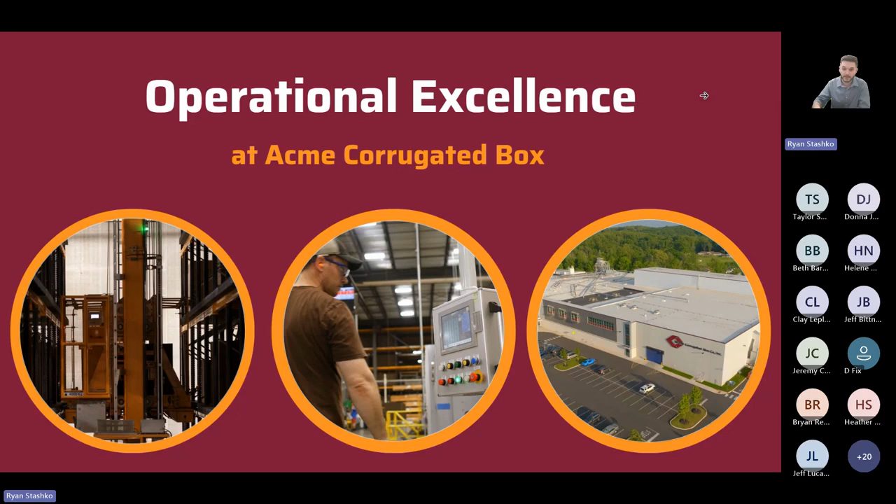As we know, technology is constantly evolving, constantly advancing, and Acme prides ourselves on harnessing that power and utilizing technology to our advantage to meet our ultimate goals. So I'll be taking you guys on a virtual tour of our WIP transfer system, and the system you're about to see is a testament to Acme's commitment to staying at the forefront of innovation and continuing to focus on how we can be excellent in everything that we do and how we can provide the best quality to our clients. So with that, we'll go ahead and get started.

So first, let's define what WIP is. It stands for work in process. In our business, it's the stacks of corrugated board that are produced on the corrugator, but not yet made into finished boxes on the converting side. The WIP transfer process is the system for how we move WIP from the corrugator to storage and then eventually to the converting side of the operation. It's a critical process for our business, probably arguably one of the most critical.

And for us, it needs to be safe, it needs to be efficient, and it needs to make sense. So today, I'll be taking you through step by step how we transfer our WIP from the corrugator to our automated high rack storage system, and then ultimately to the converting side of the plant. I'll be touching mainly on how this sets us apart from the rest and how we've deviated away from the traditional way of doing things, and why it makes us more efficient, more safe, and ultimately provides a better use for how we get to our end goal.

So with that, we'll go to the first part of the process. This whole system begins at the corrugator stacker.

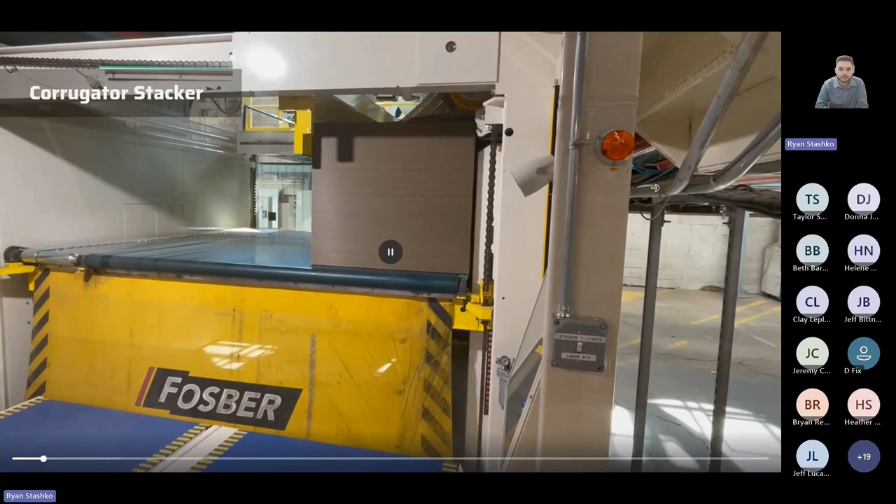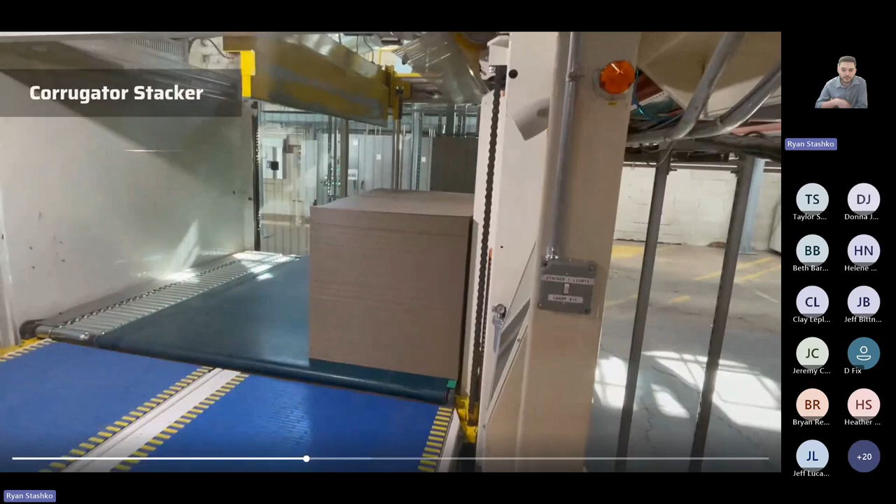What you're seeing here is what we call WIP units - corrugated sheets made into blocks or units of board. We have 3 stackers on our corrugator, each capable of running a different order, so we can run things simultaneously. Specifically, what you're looking at here is stacker 1. As the machine stacks the board into a single unit, the elevator will drop down and transfer the unit onto the outbound WIP lane.

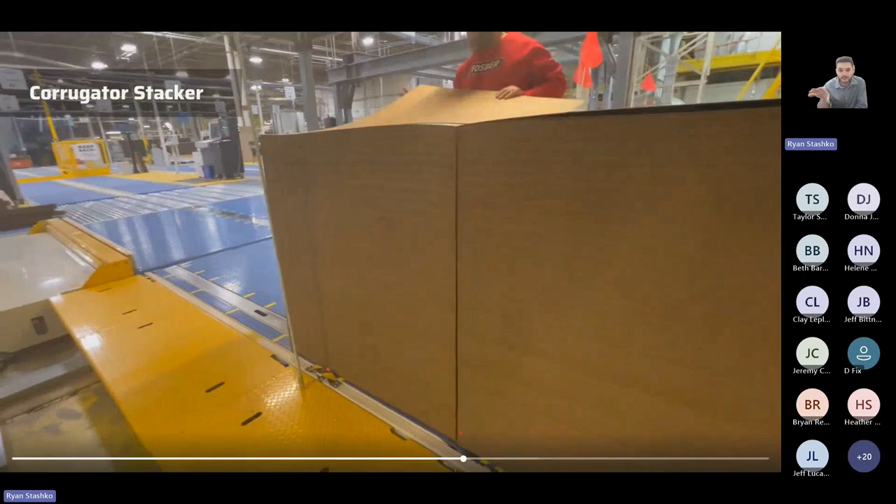For this process, there's no barcodes, no tagging whatsoever. All of the data about what's being produced off the corrugator is seamlessly transferred via software from the scheduling system to the software that controls the conveyor, to make sure everything runs smoothly and that the system knows everything about each unit being produced. The only human interaction you see at this point is the operators who check the board for quality and make sure it matches customer specification.

What you see here is this automated bar that can push each unit over to the side and make room for another stack that can then be built into what we call super blocks. This maximizes the amount of space we can use in the racking system, and it also cuts down on the congestion that happens on the conveyor lines and transfer cars, to make sure things continue running smoothly and efficiently.

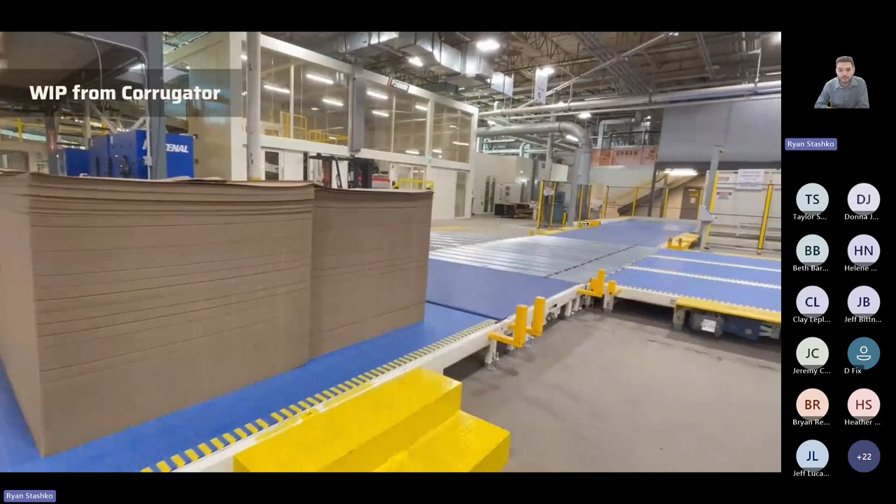From there, our WIP unit continues down the line on its journey to the high rack storage system, or we also have the ability to run our units directly out to the converting lines. We can bypass the rack if there are what we call hot orders, or orders that need to run immediately, so we don't waste time going through this process. We can go straight to the converting side.

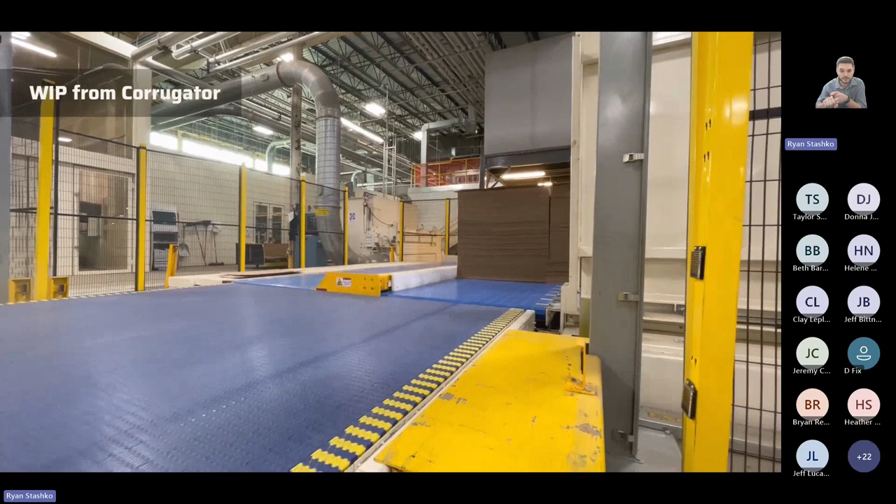But most of the time, all of our WIP gets transferred down this line as it's prepared to go into the high rack system. At this point, it's probably good to highlight the way we used to operate and the way most box plants operate today, which, as you can see here, we don't have pallets, we don't have forklifts, we don't have any banding. None of that is required in this process because of the gentle transfer between conveyors.

In the past, and how other box plants operate today, they use a system of forklifts, management supervisors, palletizers, and banding machines, to make sure all the units between the corrugator and converting are structurally sound and safe before they get to the next step of the process. None of that is required here, and it cuts down on waste, makes for a much safer environment, and ultimately increases our efficiency throughout the line.

What you're seeing here is the next step in the process before it gets to the high rack. Even though we don't require pallets, forklifts, or banding, there is still some prep work needed, which is all done autonomously. Because of the highly advanced automation, everything runs off of sensors and photo eyes, so even though a lot less material is required, there still needs to be a lot of precision involved.

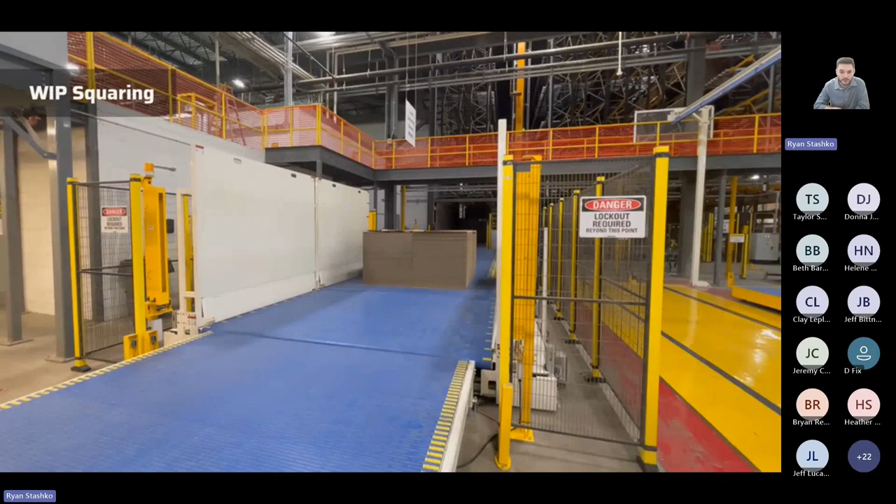So what you can see here are these inline squaring stations that each come in and square up each unit before it enters the rack, to ensure everything is nice and tight so it keeps product flowing and doesn't interrupt the racking system or cause issues. Despite not having the intricate system we had before with a lot of manual and human intervention, there's still some prep work needed, but all of it is handled through the software system, and it keeps everything moving down the line without interruption so things flow flawlessly and seamlessly.

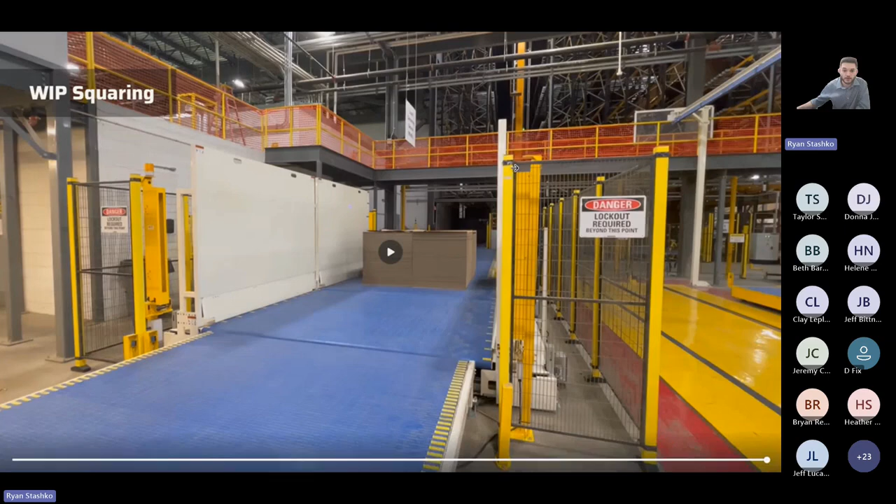From here, our WIP unit enters the next step right before we get into the high rack. What you're seeing here is our first of many automated transfer cars - this is our high rack transfer car. It's basically a conveyor on wheels that moves the WIP into the rack and also handles outbound WIP coming from the rack 24/7, 365, with no human operator necessary.

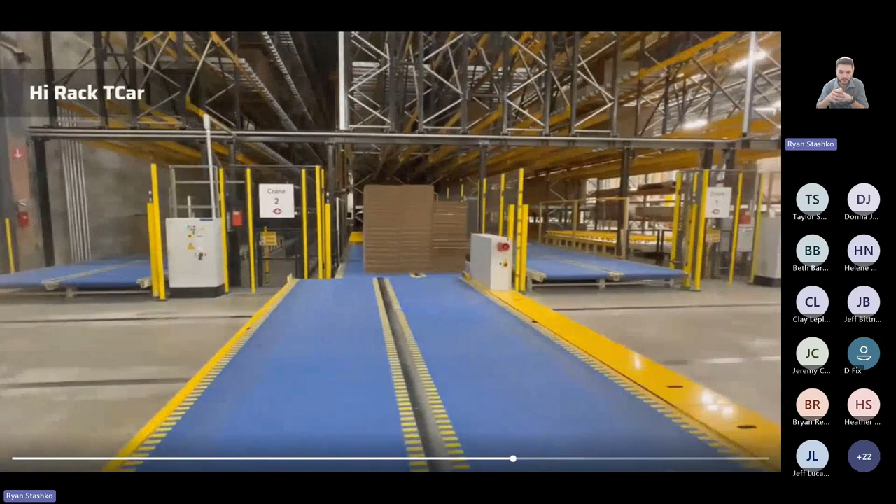As you can see here, this unit is being sent into one of 2 different aisles that we can send WIP into our racking system. Once it drops that unit off, it'll go to the next part, which is picking up the next unit that's ready to come out of the rack. As this unit gets picked up, it'll be received by the transfer car and sent down the outbound side where it's eventually sent to converting.

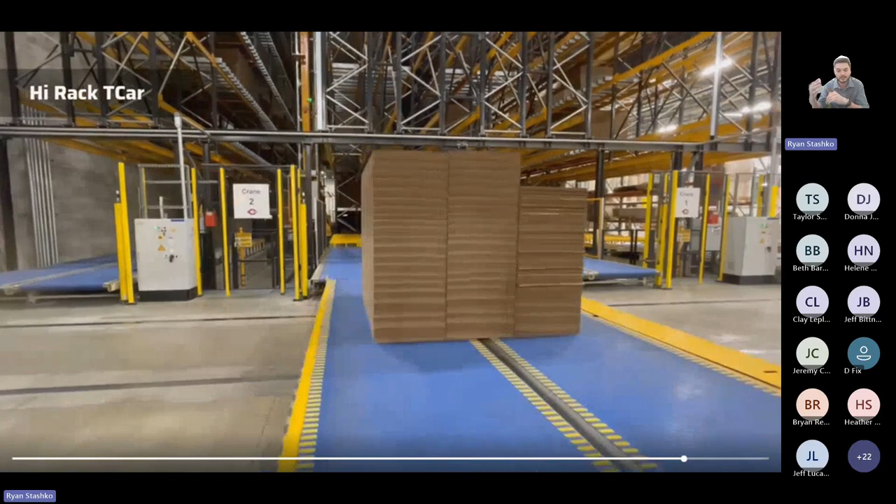Again, all of this is controlled over the cloud with different software integrations that are all talking to each other at all times, so that converting knows when a job is needed on their machine - it'll automatically talk to the rack to get products sent out this transfer car and down the WIP lanes. Similarly, the racking system knows exactly what's coming in at all times, and knows precisely how to set it and where to put it within the rack to ensure there's space and it's placed in an area where it can be recalled easily.

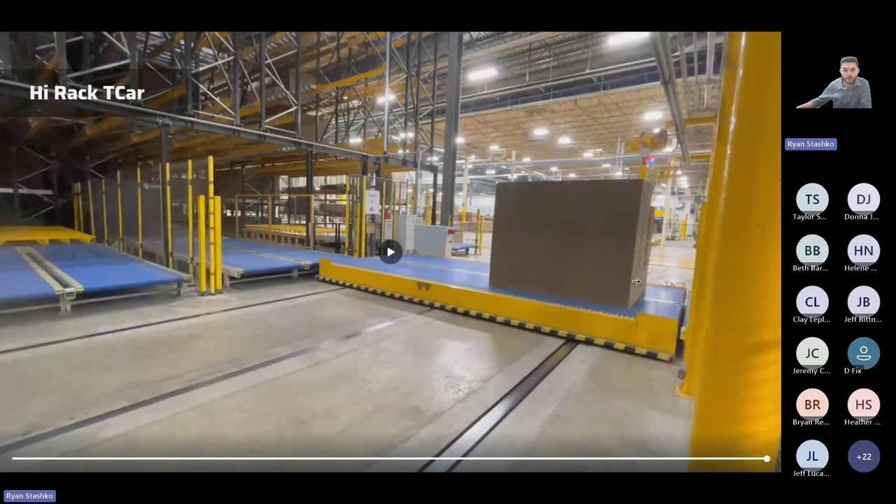So let's dive a little into the high rack system, which really today is the centerpiece of the plant. Standing at 60 feet tall and having 2 aisles of rack space, it's our temporary storage hub for our work in process before it gets to the converting side of the operation.

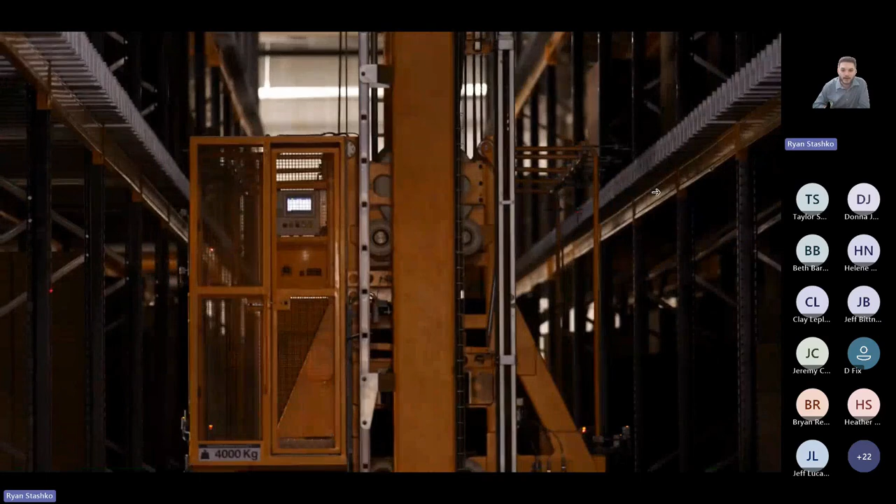The high rack is controlled by 2 automated stacker cranes, again, 2 pieces of equipment that don't require a human operator. Each one of these cranes runs back and forth down these aisleways all day long without the need for a human operator, and each one handles putting WIP into the rack as well as taking WIP out of the rack and bringing it out to converting.

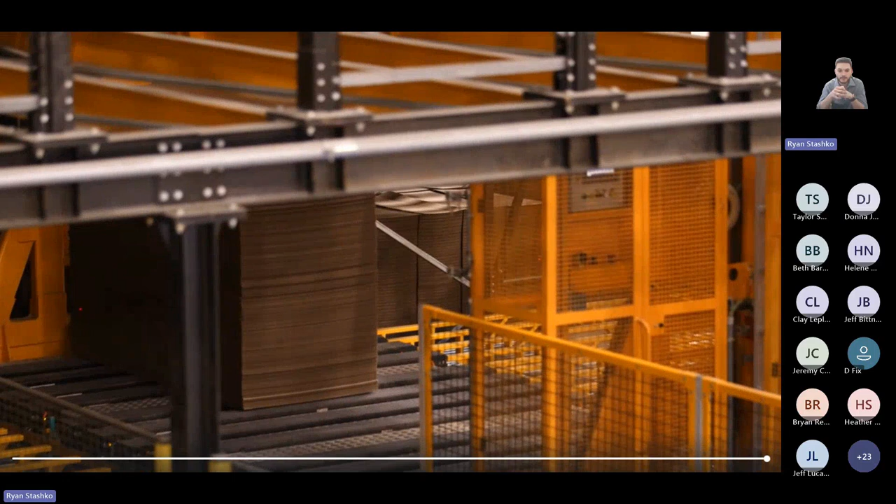Each crane is equipped with forklift style arms that actually reach out and grab the unit as it's bringing it into the crane. This ensures that there's no damage to any of the sheets within the unit, making them all usable and allowing them all to be converted into boxes.

Previously, and the way things typically operate in this process with forklifts and banding, it often causes damage to either the bottom few sheets and even some on the top few sheets that are typically always destined for the waste bin. But in this process, because everything is designed to transfer gently with no damage to the unit itself, virtually every piece of board in every unit we store is usable in the operation, which completely cuts down on unnecessary waste.

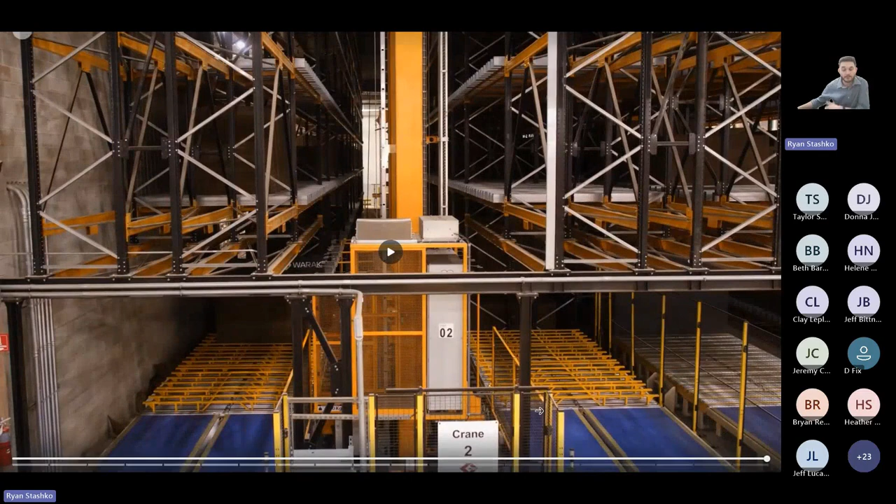From here, again, because of the software integration we have set up, the crane knows exactly where to be at all times. So for this specific point, this unit that enters the loading station needs to be picked up by the crane. The crane comes, knows when to pick it up, and picks it up to send it out into the rack.

From here, it'll pick up the unit and then send it on its way based on what it knows about the unit from size, specifications, and when it's needed to be pulled out. It will then store it in a location that makes the most sense from an efficiency standpoint. Again, all of this is controlled automatically with hardly a second thought to anybody who's out on the plant floor.

So just another few points on the high rack, going back a second. The racking system itself is only the second of its kind installed in a corrugated plant in the United States. From a storage perspective, it allows us to store up to 9 million square feet of corrugated board.

That's in contrast to how we typically used to run this process, taking it off the machine with forklifts, with all of our WIP stored on the plant floor. As you can imagine, that's a messy process, not very safe, and can be very inefficient. However, this system allows us to maximize our storage, giving us 3 times the amount of space we were allowed to store on the floor before.

We were capped around 3 million square feet. This gives us 9 million square feet, which increases capacity, but it also allows us to shut the corrugator down for required maintenance without starving the converting side, allowing that part of the operation to run without any interruption.

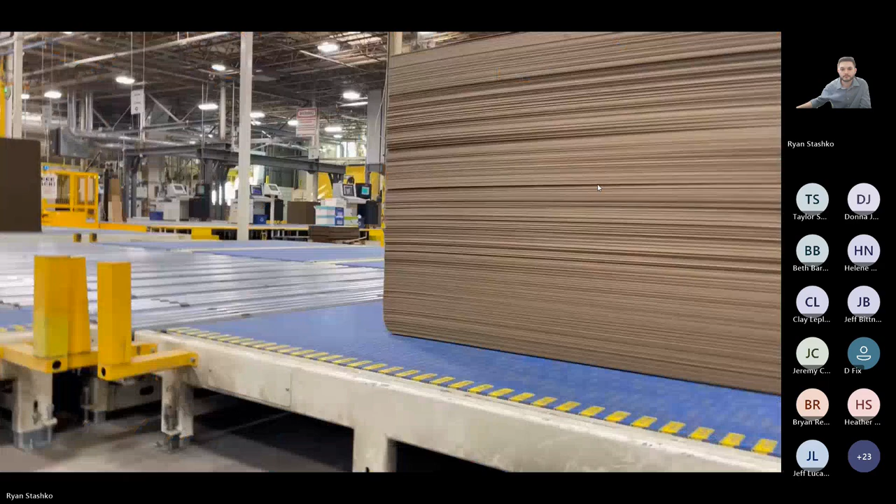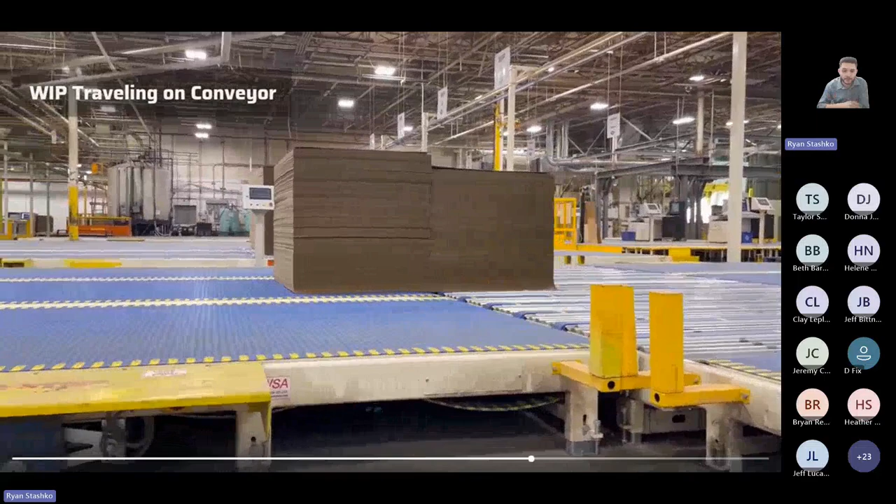So from here, our WIP is pulled out of the rack when it's called to from the converting side. When it's ready to be converted into finished boxes, it'll be pulled from the rack and sent out our outbound WIP lanes. From here, it'll enter the next and final step of the process, sending the units to the converting machine to be made and converted, and eventually sent to our clients as finished boxes.

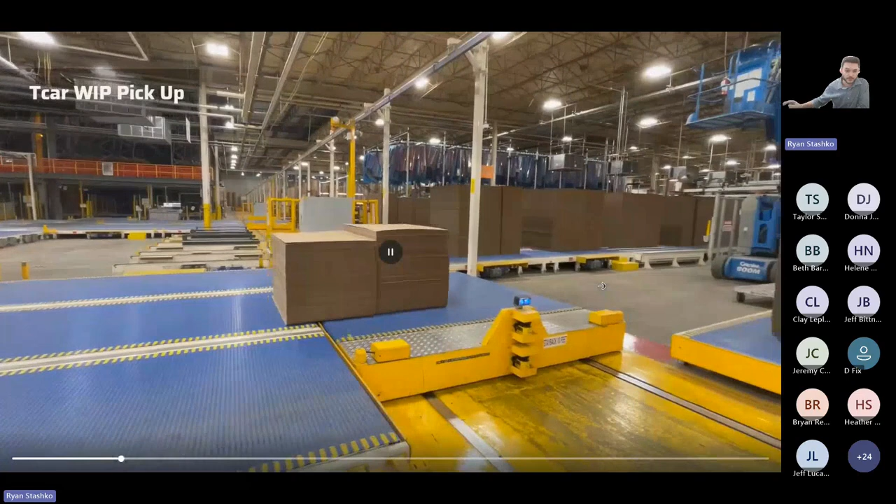So again, there's another system of transfer cars on the converting side that will come and pick up each unit. All of this is tied into the software, so it knows exactly where to be at any given time, just like the cranes. When a unit is ready to be picked up, the transfer car will arrive and pick it up and send it on its way to whichever converting machine it's destined for. Again, no pallets, no tags, no humans whatsoever.

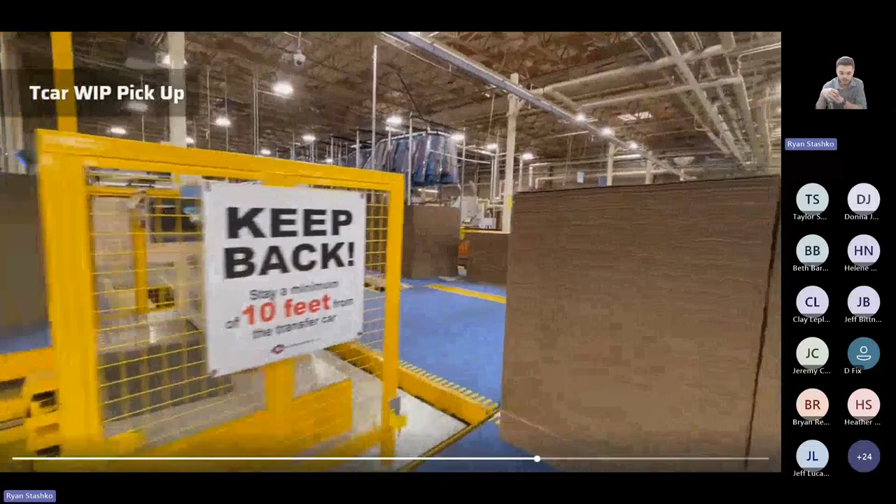Because of all the flow of data between the different software integrations, and knowing where all of this stuff needs to go and when, all of this happens seamlessly with hardly any delay. So on the converting side, the operators are not starved for work. They're not constantly having to look and see what can be sent to them next. They are constantly fed with whatever is in their lineup at all times without really needing to give a second thought to it.

So this process in general is as if you were calling for an Uber, and your Uber driver shows up before you're even finished requesting the ride. Something that would be kind of creepy in real life, but for us in the corrugated plant works pretty well.

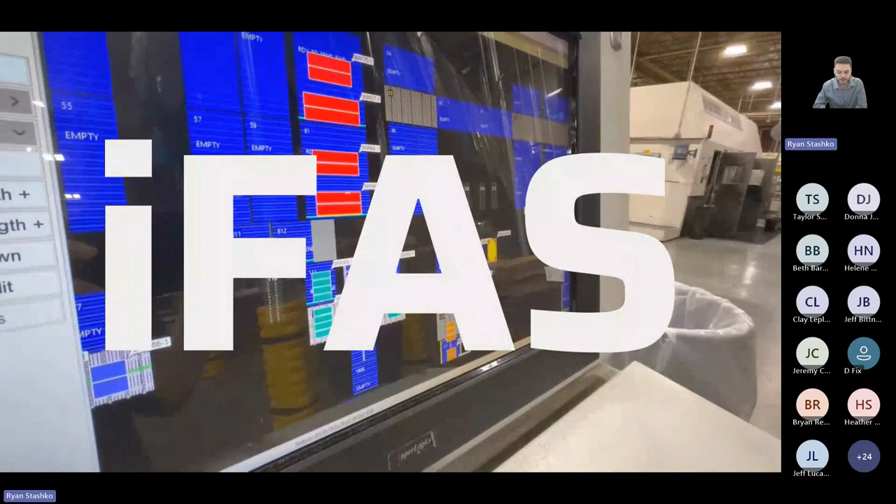So that begs the question of how does all of this run so seamlessly with such little human intervention? And the answer is iFAS. iFAS is an acronym for Intelligent Factory Automation System. Essentially, it is the brains of this entire operation.

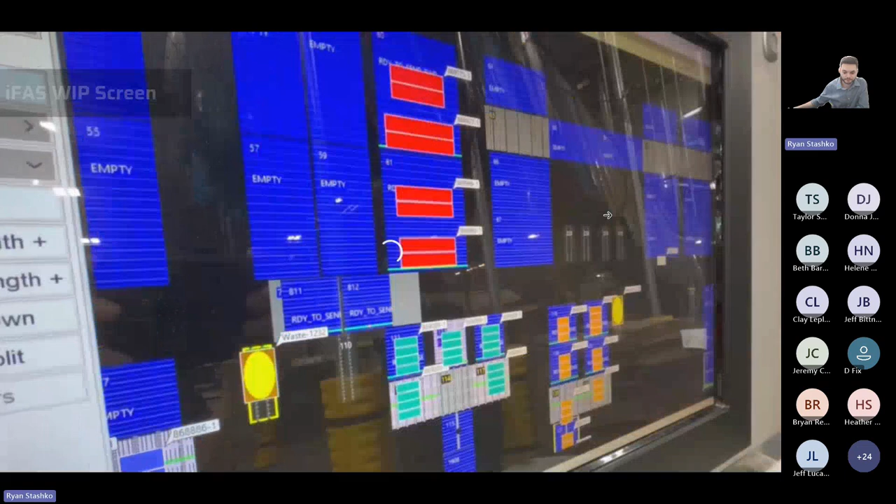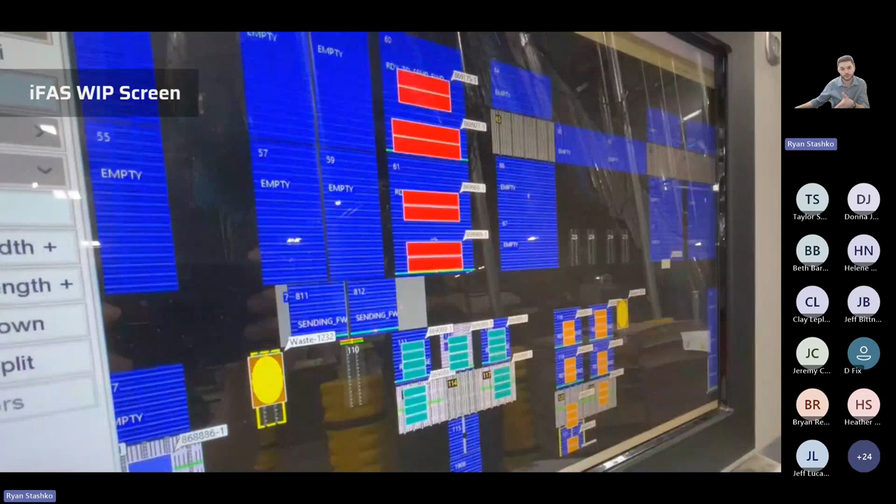iFAS is directly integrated to our plant scheduling software and the conveyor systems, high rack, and corrugator side as well, so that it knows and orchestrates this whole process from start to finish, knowing what's being received from the corrugator, where it's going throughout the process, whether it's straight to converting or over to the rack, and finally which machine it needs to go to and when.

In addition to orchestrating this whole process, these iFAS screens are installed throughout the plant, allowing operators to see a visible real-time view of the entire operation from these screens, knowing exactly where units are at any given time.

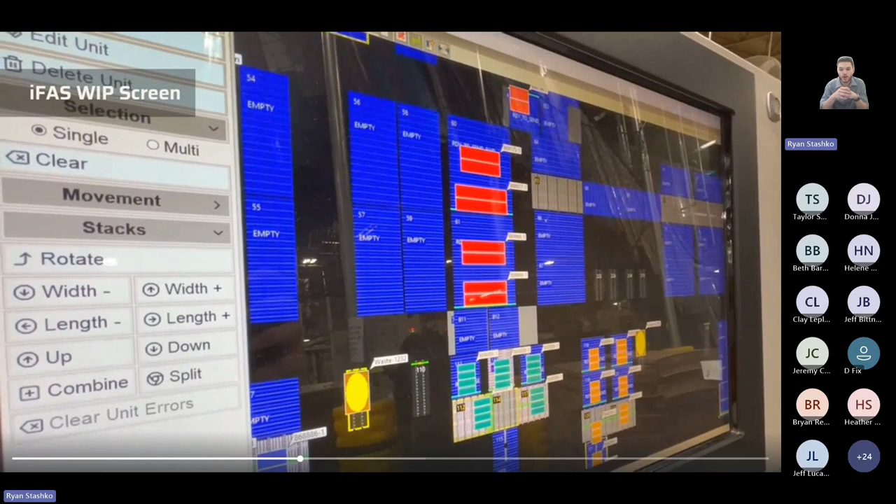It's also cloud-based, so our scheduling team can see this upstairs at all times as well. So if there's a job that they know is needed on a certain machine, they can simply look at this screen, identify it, and know exactly where it is and when it will be entering whichever stage of the process it needs. This is showing an example of what that looks like in real time.

You can see the boxes as they were being conveyed are shown on the screen here. Let's take a look at that again.

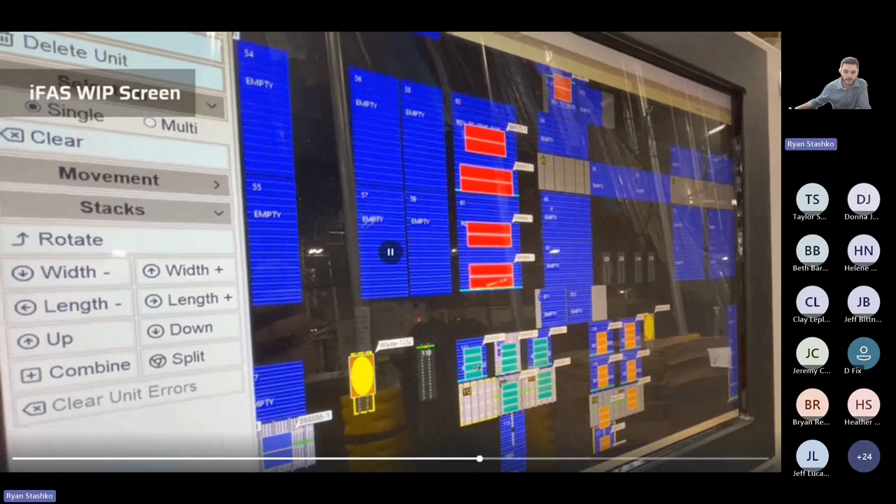So as the transfer cars move on the screen, that's where they're moving in real time. And same thing here, you'll see this green box start moving to the next conveyor that's physically represented in real time here on the infeed line.

So it allows us to view WIP, track WIP through the entire process, and it displays it on all of our iFAS stations to ensure that we don't lose track of any units.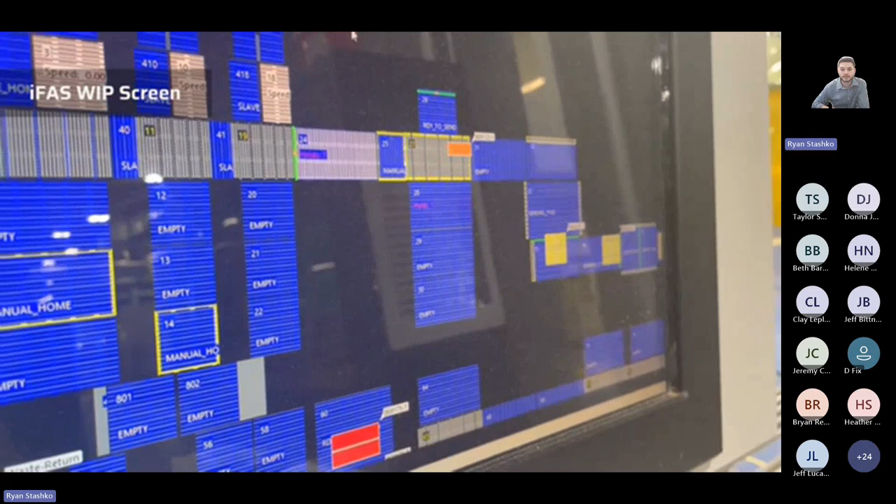Going back to how we used to do things with manual tags and barcodes and storing all of our units on the floor, it made it difficult to make sure that we knew exactly where everything was at any given point. This system solves that problem by ensuring every single order number can be looked up in this system and have a specific point on these screens where we can see where it is, whether it's in the rack, on a conveyor, or on a converting machine infeed.

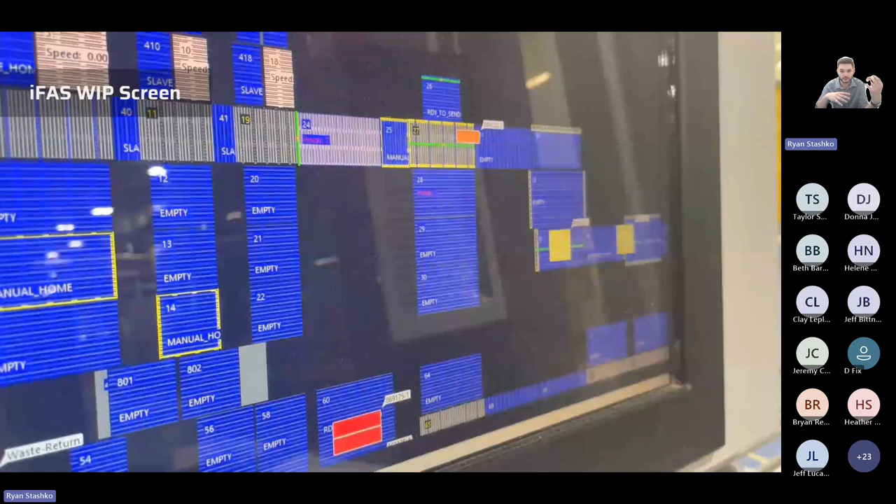It gives us a whole lot of flexibility and again, orchestrates this entire process from start to finish. Without having iFAS, none of this would be possible. And it takes a process that would take a team of several different individuals and several different processes all the way down to one single point where it only requires one person to operate the entire system.

So with that, that's our overview of the process. I hope that this is something that was informational to everybody here. I know we'll have some questions coming in the chat. So I just wanted to make sure that we were able to highlight probably one of the most advanced pieces of our process in the plant as of today. And it's only one part of how we truly innovate here at Acme and harness the power of automation.

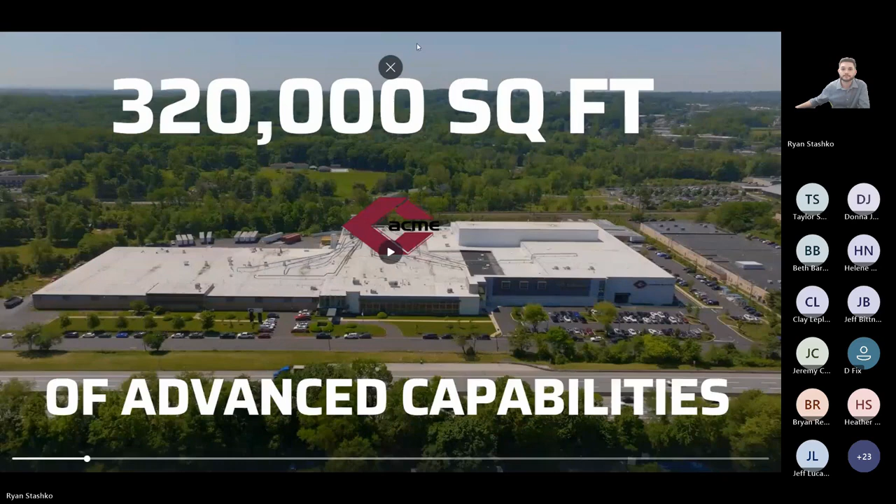Thank you so much, Ryan, for that exceptional presentation. Ultimately what you've seen today represents the cornerstone of our commitment at Acme to innovation and efficiency. Our automation systems not only enhance our production capabilities, but they ensure consistent quality and reliability for all of you, our customers. So at this point, I'm going to open the floor up for questions.